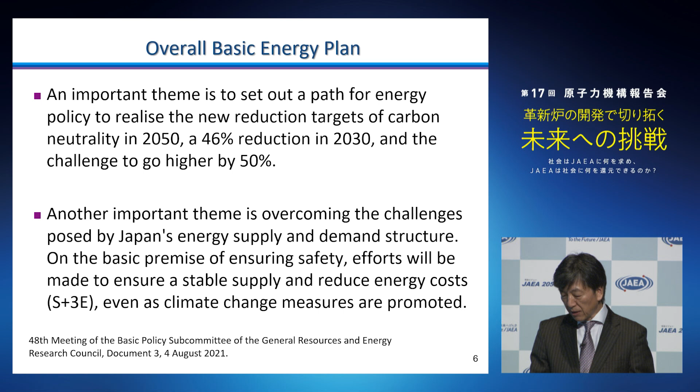It was one year ago that this Energy Basic Plan was formulated, and a lot has happened in the year since then: the invasion of Ukraine by Russia. This caused a disturbance in the oil and gas market. So the international community is in a state of energy shortage or energy cost escalation.

In addition, these situations are not transient, but rather a period of energy crisis directly related to security, which can occur structurally and cyclically. And Japan has been asked to save electricity almost every year for the past several years. It has been happening every year that the reserve ratio of electricity is below 3%, a very small number.

The recognition that the world is experiencing fault line fluctuations in energy was expressed at the Green Transformation GX conference held in August of this year. We must utilize nuclear energy to respond to these issues. It is said that Japan is currently experiencing an energy crisis and energy policy delays.

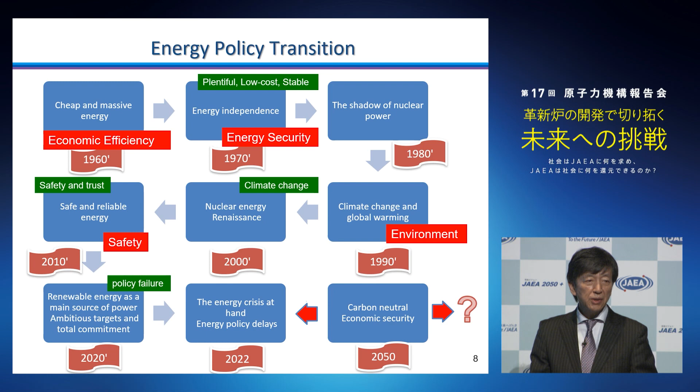Recognizing that we are experiencing a policy failure, that is, an energy crisis and energy policy delay, we are definitely at a point in time where we must develop a firm vision for the year 2050 or even beyond 2050.

Here is a look at how energy and its leading role has shifted. This is the logistic model of energy share. The logistic model is a model that is widely used to describe the prosperity of living species and to explain the phenomenon of one species thriving and then being replaced by another species.

The essence of this model is that the share of one energy source is set as F. The idea is simple: the rate of change is proportional to the share of other energy sources.

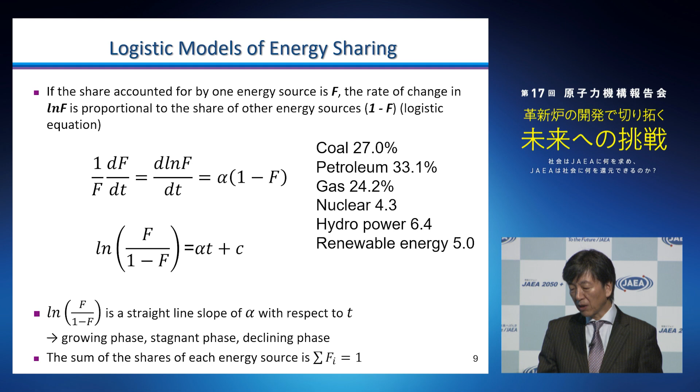On the right, the current share of energy worldwide is described. We still rely heavily on fossil fuels. You can see that nuclear power and renewable energy account for 4.3% and about 10% respectively.

This model was proposed by a scholar named Marchetti, who wrote a paper in 1977 in which he showed a graph like this. This is wood, firewood.

Nowadays, we would call it biomass. And then there is coal, oil, gas, nuclear, and finally, new energy. On the right axis, the share of each energy is written.

Looking back, coal accounted for 70%, which was the largest segment at that time. Petroleum is at 49% at the most.

The thin lines in the graph are the actual data. According to Marchetti's paper, the logistic model explains the share of energy very well.

In other words, it explains that when a new energy source appears, it replaces the energy that has been the mainstay of the market and becomes the mainstream.

This is a 1977 paper by Marchetti, and the reason why we had this kind of model is because our goal was to have abundant, low-cost, and stable energy. In other words, the main energy source has shifted from wood to coal, then to oil, and so on.

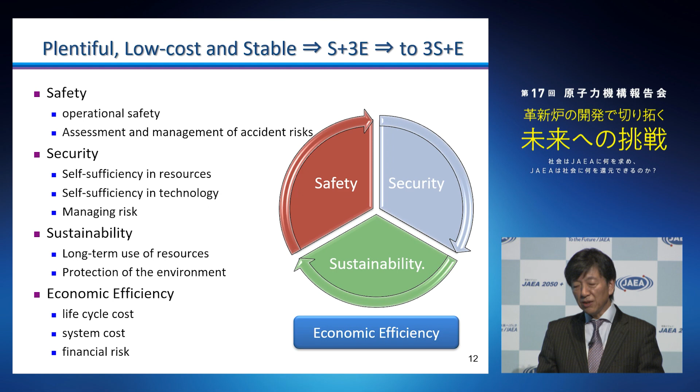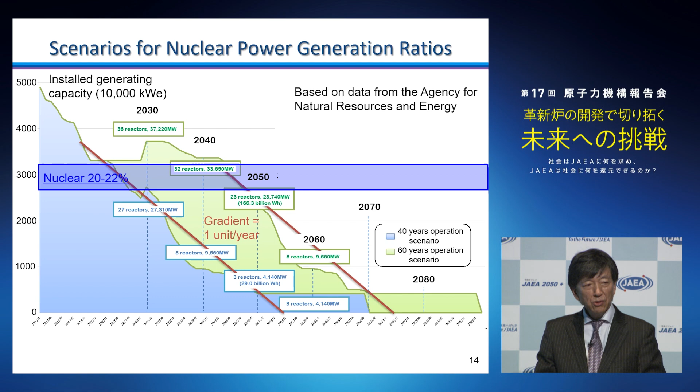As you see, the left line representing the 40-year operation scenario goes below the 20 to 22% range starting from 2030. In the case of the 60-year operation scenario, the line goes below that range from around 2050. The gradient of the line is equivalent to a loss of 1 gigawatt per year, which is equivalent to 1 unit of nuclear power plant.

The feature of the innovative light water reactor is that it has predictable regulatory requirements, foreseeable time of realization, and innovative safety improvements. Priority is given to the development of these innovative light water reactors. Next is the small light water reactor, which the world has high expectations for. From the standpoint of contributing to international cooperation and supporting the supply chain in acquiring business opportunities, Japan is planning on continuing its development to secure options with future needs in mind.

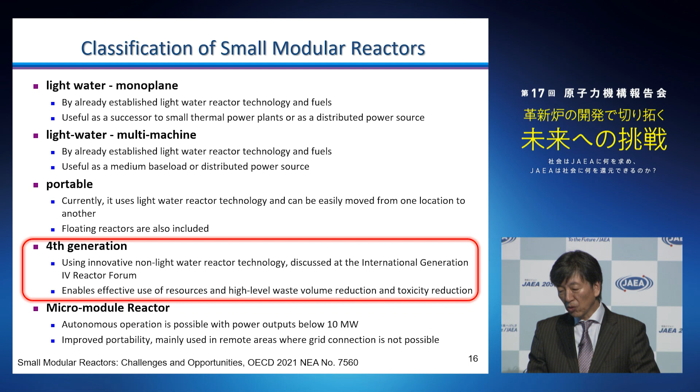Out of them, we should pay attention to the 4th generation reactor. This utilizes innovative non-light water reactor technology and is discussed at the International Generation 4 Reactor Forum. It enables effective use of resources, high-level waste volume reduction, and toxicity reduction, meaning sustainability is an important requirement of this reactor. I think the 4th generation reactor's technological importance for Japan from 2050 onwards comes from this sustainability requirement.

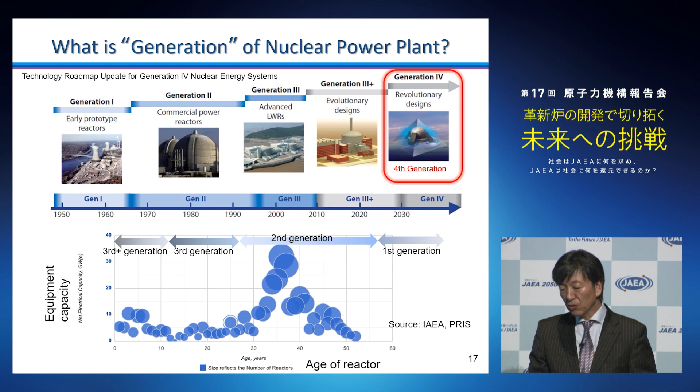Generation 1 reactors were built in the 1950s to 60s, and most of them have already retired. That means the main nuclear power plants that currently exist belong to Generation 2 and Generation 3.

As for the fourth generation nuclear energy system, there are 8 objectives in 4 areas being set by GIF, the Generation 4 International Forum. The 4 areas are: 1. Sustainability, 2. Economy, 3. Safety and reliability, and 4. Proliferation resistance and physical protection.

I mentioned that sustainability is a feature of the fourth generation reactor. As part of sustainability, it is pointed out that fourth generation nuclear energy systems are required to provide global sustainable energy production, which is clean, long-lasting systems that make good use of fuels.

At the same time, the fourth generation nuclear reactors shall minimize and manage radioactive waste, particularly to reduce the long-term management burden, thereby improving public health and environmental protection. Based on such requirements, we must consider energy systems required in Japan for the future.

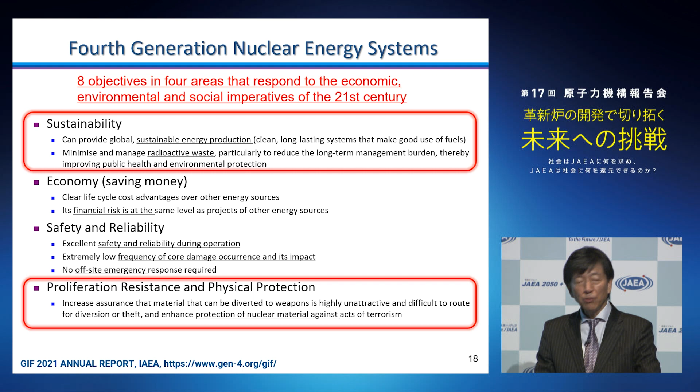As for economy and safety and reliability, they were always necessary in nuclear energy systems, no matter which generation the system may belong to. Now, I would like to share with you this slide that refers to an aspect of effective resource utilization.

The graph shows a forecast of uranium supply and demand. The source is the Red Book, a report on uranium. The solid line represents uranium demand. On the other hand, the shaded areas represent uranium supply. Currently, uranium supply and demand are balanced, though, as you see on the right, if usage by nuclear power plants maintains its pace...

...demand for uranium is around 62,000 tons in 2021, but under a high-case scenario, it will be 70,000 to 99,000 tons in 2030, and 80,000 to 156,000 tons by 2040.

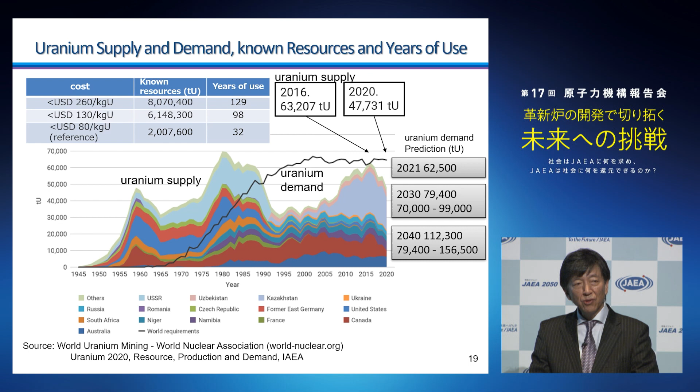As indicated in the table, in case of uranium price at $130 per kilo, which is a realistic price considering mining, years of use of uranium are expected to be 98 years. With that in mind, it is expected that ways to secure uranium resources and share uranium, against the backdrop of decarbonization trends in the world, will be major challenges.

I have been talking about a variety of features that nuclear power has and characteristics required. This is a diagram I created to illustrate my interpretation of innovation according to Christensen. According to him, there are two different innovations: sustained innovation and low-end disruptive innovation.

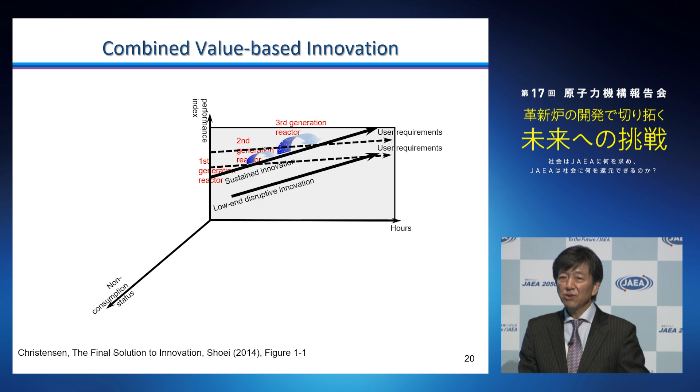The history of nuclear power development has seen the rise of first-generation, second-generation, and third-generation reactors, and perhaps sustained innovation led light water reactors to evolve into improved light water reactors and generation 3 plus reactors. The value that these reactors had was economy. Development of nuclear power took place to provide stable power and enhance economy.

On the other hand, there is another performance index, which is new market-based disruptive innovation. Renewable energy, at its initial developmental stage, was considered insufficient compared to the level of users' performance requirements. Though high safety and environmental compatibility are the values that renewable energy has, and now it has made its way to be a main power supply.

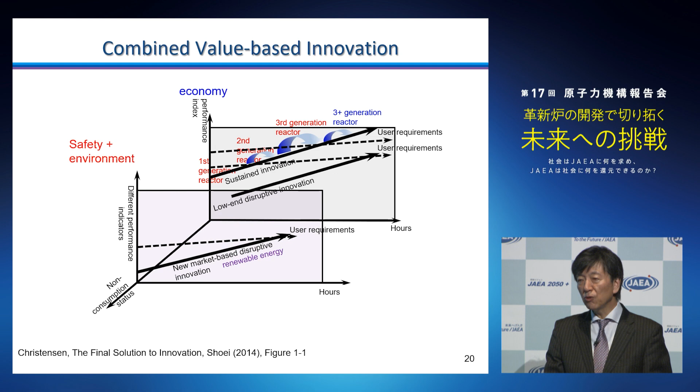So there is the light water reactor that sought after economy, which led it to evolve into generation 3 plus. On the other hand, there is renewable energy that has placed weight on safety and environment, which can now satisfy user requirements. In the future, what will be the main energy? To answer that question, we must create new performance indices, or in other words, new values. I understand that small modular reactors and fourth-generation reactors are examples of that.

We discussed the energy policy of S plus 3E under the context of diversification of values, which was in a way similar to diversification of power supply.

In the future, we will aim to improve welfare by utilizing neutron and radiation. As part of high-temperature gas-cooled reactor, we will utilize heat and deploy it to a variety of industries. Furthermore, from the standpoint of resource and waste, we will develop a sustainable energy system, and it is nuclear power that can propose these multiple values.

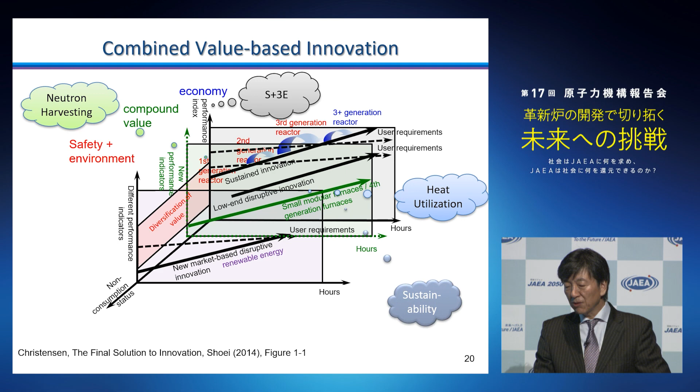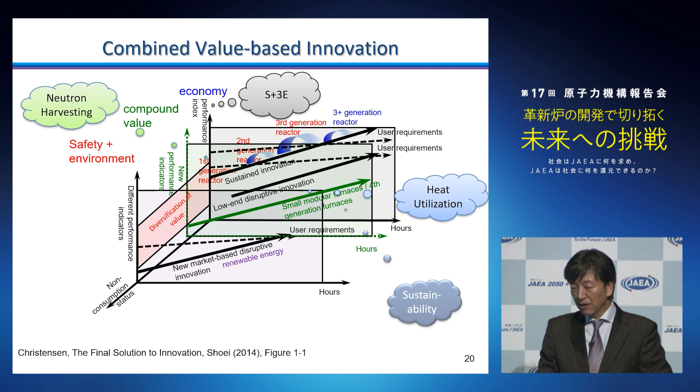I believe that's one important role to be played by this field. In other words, we must not only aim for economy, but also safety. Different technologies, stable supply, and diverse ways of utilization—all these are our expectations for the nuclear power field.

Let me quote from a book written by Jared Diamond. He wrote that invention is the mother of necessity, even though people often say that necessity is the mother of invention. Instead, people argue that an extraordinary genius uncovers a social need and makes a great invention to fulfill it. But he indicated that that is not right. In reality, invention is the mother of necessity. He pointed out that many researchers improve inventions made by predecessors, and a great invention is born when there is an application to which the invention matches, and when the application of the invention is found.

If you look into the actual history of technological development, you will not find a case where a great invention is made all of a sudden. I suppose that many researchers are continuously making improvements by sharing their ideas, and when something that fits the society appears, then that technology will spread all at once. Of course, economic efficiency is quite important for the dissemination to take place. It has to be inexpensive, and it would not be accepted by the society without social status. Furthermore, compatibility with existing systems, in other words continuity, is also necessary. Lastly, Diamond pointed out that the benefits must be straightforward as well.

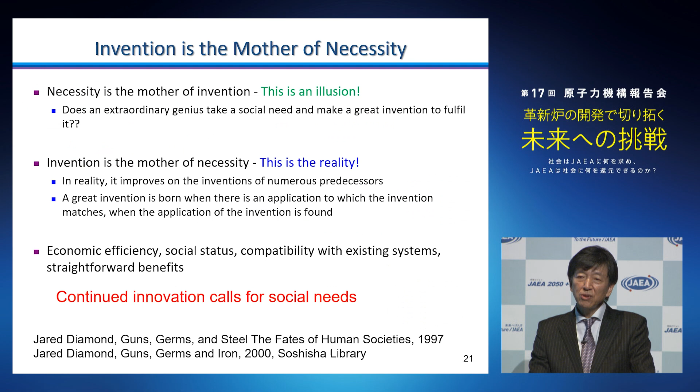Continued innovation calls for social needs. May I quote Charles Robert Darwin, the academic famous for his evolutionary theory. He said, "It is not the strongest of the species that survives, nor the most intelligent that survives. It is the one that is most adaptable to change."

Today's theme is innovative reactor. We are trying to create the future with its development. I understand that President Koguchi mentioned in his opening speech that the time is changing, and JAEA should also change to make maximum achievements out of minimum resources available. May I close my remark by wishing that the Japan Atomic Energy Agency, which holds Japan's most specialized and capable facilities and human resources, would lead establishment and dissemination of innovative reactors. Thank you very much for your attention.

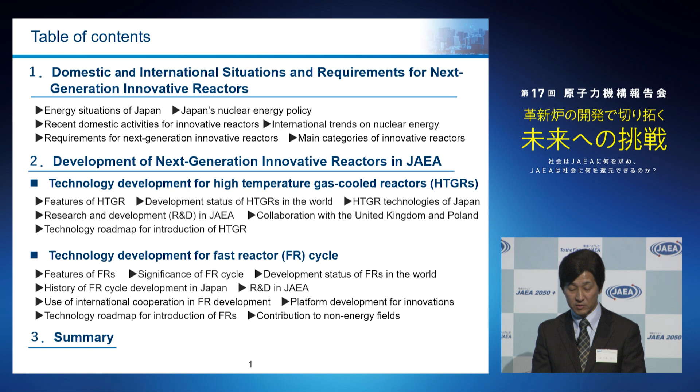My name is Oshima. I oversee the sector of fast reactor and advanced reactor research and development. Today, I would like to report on JAEA's mission for deploying next-generation innovative reactors in Japan. First, I would like to introduce the current status of nuclear energy in Japan and abroad and the requirements for next-generation innovative reactors, followed by the significance of next-generation innovative reactor development, development status, and future outlook.

First of all, I would like to talk about the domestic and international situation and the requirements for next-generation innovative reactors. This slide is a brief summary of the energy situation in Japan. There are 3 points. The first point is Japan's energy self-sufficiency rate is 11.2%. As you can see in the table below, this is very low among developed countries.

As you all know, energy supports all of our food, clothing, and shelter. The fact that 90% of this energy is imported means that energy prices fluctuate and therefore are directly affected by the strong or weak yen. In addition, as seen in the recent invasion of Ukraine, resources themselves may become difficult to obtain. In such cases, there is concern that maintaining industry and livelihood itself may become difficult.

The second point is that the composition of electric power sources is currently centered on thermal power. When thermal power is the main source of power, CO2 emissions are extremely high. The CO2 emission coefficient is about 8 times that of France, which is a very large figure.

The third point is that European countries have interconnected grids and can supply electricity to each other. But in the case of Japan, we are an island nation and have to manage on our own.

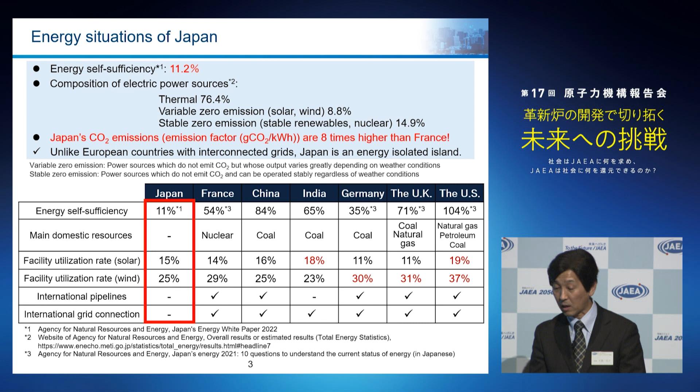Renewable energies are now being discussed in various ways. For reference, here is a report from a British research institute describing the area required for renewable energy, showing the amount of land needed to produce hydrogen equivalent to the amount of oil used annually in 2019. The area circled in red is the area that will be covered by wind power, and the area in yellow is the area that will be covered by solar power.

As you can see, it will be quite difficult to cover with renewable energy alone. Also, we have to consider that equipment requiring such a large area will become waste after 20 to 30 years of use. Renewable energy and nuclear energy each have their weaknesses and strengths. I believe we should aim for the best mix that combines the advantages and complements the disadvantages of each type of energy, as there is no such thing as perfect energy.

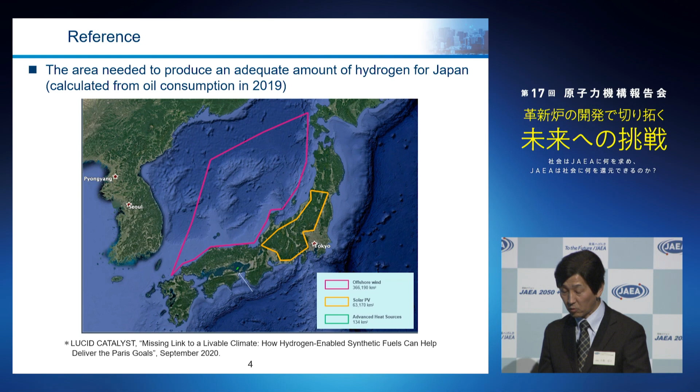This sheet summarizes our country's policy on nuclear energy. As Dr. Yamaguchi explained earlier, the Green Growth Strategy was compiled last year. The details are outlined by Dr. Yamaguchi, so if you look at the blue area in the middle, the growth strategy proposes, until 2050, innovative reactors including FRs, HTGRs, and SMRs.

In particular, it states that fast reactors should be developed based on the strategic roadmap decided at the Ministerial Conference on Nuclear Energy in 2018. In addition, although not energy, there is the experimental fast reactor JOYO, which has been found capable of producing large quantities of radioisotopes for medical use, rarely found in the world. For this reason, it is stated that JOYO is expected to contribute to advanced cancer treatment through restart of operation.

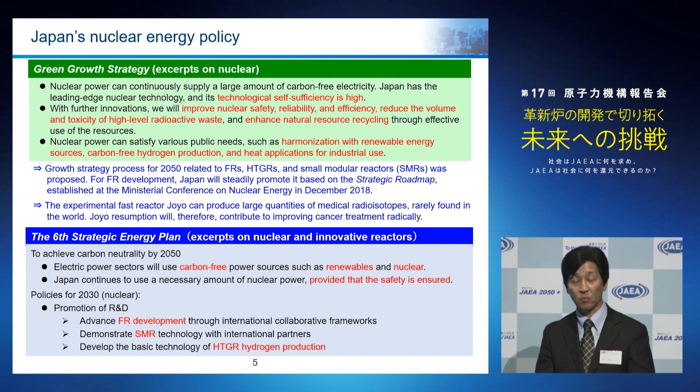In addition, the sixth strategic energy plan, which came out after that, basically follows the green growth strategy. Recently, there have been active discussions on innovative reactors in Japan. For example, the Nuclear Energy Subcommittee, chaired by Dr. Yamaguchi, established a working group on innovative reactors, and at the end of July to August this year, an interim report on the technology roadmap for the development of innovative reactors was compiled.

Fast reactors are being discussed in the Strategic Working Group of Fast Reactor Development Council to revise the strategic roadmap to make it more concrete. The key points discussed here are whether sodium cooling is a promising concept from the viewpoint of maturity, the conceptual design of a demonstration reactor, what the roadmap for R&D should be, and what roles should be played by the government, research institutes, private sector, and other players.

The next topic is also in the process of discussing basic technology in the study group on R&D infrastructure for next-generation innovative reactors. The Japan Atomic Energy Commission of the Cabinet Office is also discussing a review of the basic policy for use of nuclear energy, which was formulated in 2017.

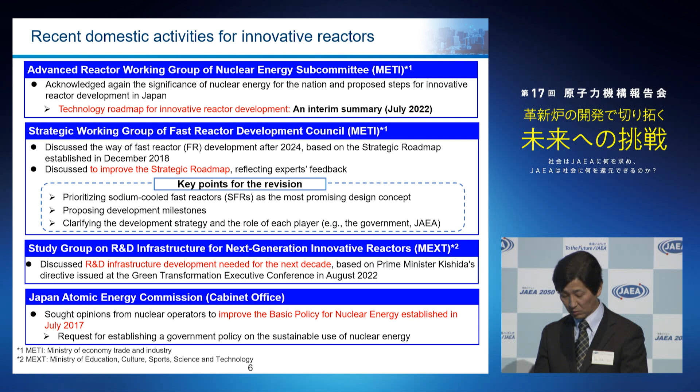As for the United Kingdom, it has decided to increase the share of nuclear power generation to 25% by 2050. As for innovative reactors, a demonstration reactor project for HTGR was started this year, aiming for operation in the early 2030s; we, JAEA, are also participating in this project. In addition, Poland's energy policy through 2040 states it will have 6 nuclear power plants in operation by 2043, and has also expressed the possibility of using high-temperature, gas-cooled reactors, mainly as an industrial heat source.

In the U.S., as mentioned in the video letter, the U.S. Department of Energy has been promoting the Advanced Reactor Demonstration Program, ARDP, which will build 2 demonstration reactors, one of which will be a sodium-cooled FR built by Bill Gates' TerraPower Inc.

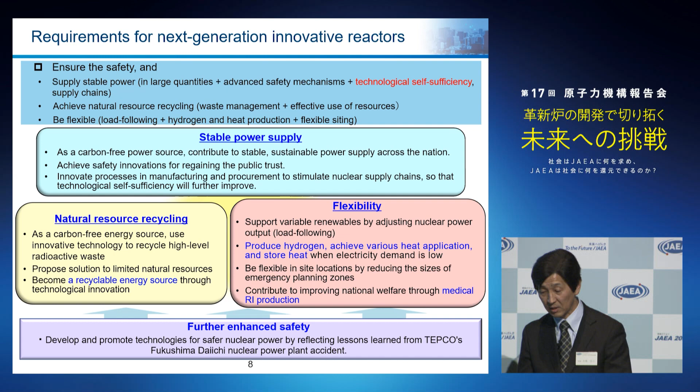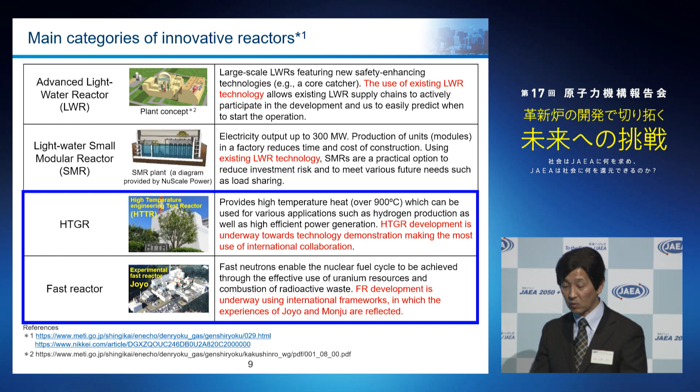As mentioned in Dr. Yamaguchi's lecture earlier, the working group on innovative reactors has selected 4 types of reactors. The first at the top is the advanced LWR, the second is a light water SMR, and then the HTGR and the fast reactor. The details were explained, so I will omit them, but we are currently conducting R&D on HTGRs and FRs in this group.

This fuel is embedded in a structural material called graphite moderator, or it is placed in it. The graphite moderator has high heat capacity and great thermal conductivity, so it can freely dissipate heat outside the reactor. It also has the property of easily cooling fuel. It is also heat resistant up to about 2,500 degrees, making it extremely resistant to high heat.

Thirdly, helium is used as a coolant. Helium is a chemically stable gas that does not react with other gases to produce hydrogen or cause corrosion. Because it is a HTGR that combines all these 3, it has very safe features, so that even if the control rods cannot be inserted in the event of loss of power or coolant, the reactor will spontaneously shut down, cool down, and confine the radioactive materials.

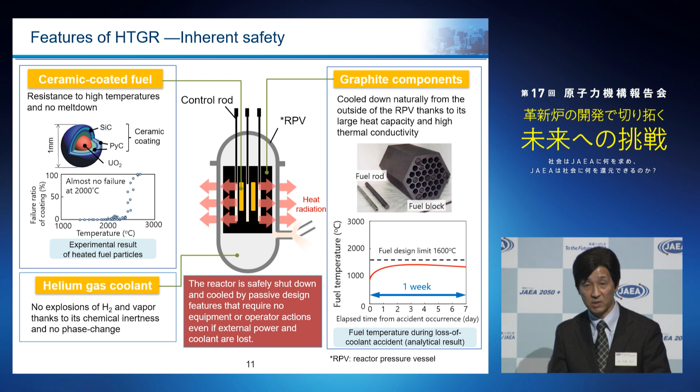We believe that high temperatures of HTGRs can be effectively utilized for hydrogen production. This could replace CO2 in fuel cell vehicles and steelmaking in the future. In addition, various types of heat are used in chemical plants for industrial applications. We believe that it will be possible to supply such heat in the form of steam.

Third, by putting together a hybrid system with renewable energy, we can compensate for the shortcomings of various energy sources and provide CO2-free energy.

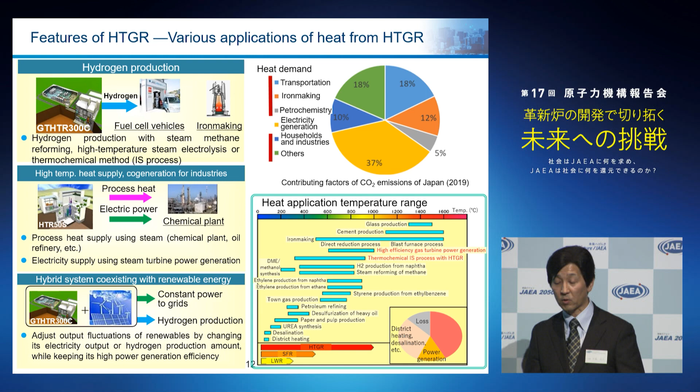The pie chart here shows the source of CO2 emissions. We are now focusing on electricity, which accounts for about 37% of this total. The rest is, for example, transportation 18% and steel 12%. We need to reduce carbon dioxide emissions in this area as well. In this sense, we believe that we can contribute by using the high temperature of the HTGR.

There is a worldwide movement to pursue the merit of HTGR. As I mentioned earlier, the US DOE is taking the lead in supporting the private sector to develop this technology. The UK is also moving forward this year with plans to build an experimental reactor in the early 2030s. Poland has also started a conceptual design to build an experimental HTGR, and our JAEA is participating in this project.

China also has a demonstration reactor already in operation. However, the temperature is over 700 degrees, which is lower than our HTTR of JAEA in Japan, which has a record temperature of 950 degrees. In China, they are generating power. In Japan, we have achieved the highest temperature of 950 degrees and are conducting various tests.

China and Japan are the only countries that actually have HTGRs. In this sense, we believe that Japan has an advantage.

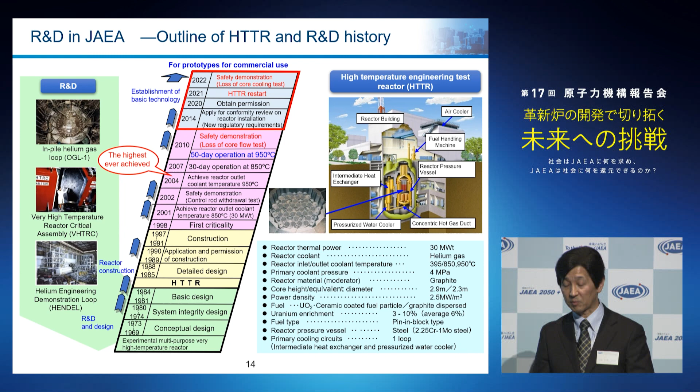On the other hand, after the Fukushima accident, the plant was temporarily shut down to comply with the new regulations together with other facilities. Last year, however, the Nuclear Regulation Authority approved the reactor as safe and it was restarted.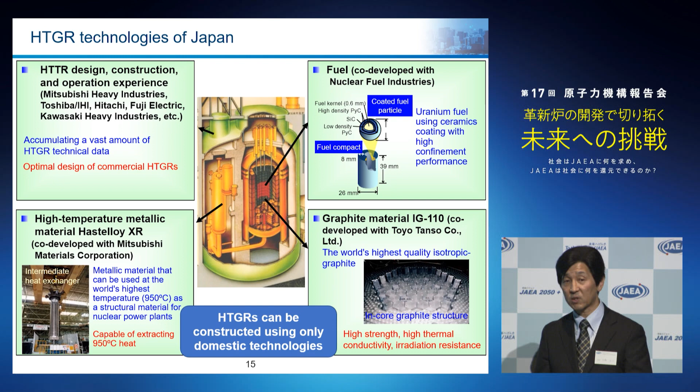This HTGR technology is also very beneficial in terms of technological self-sufficiency. As I mentioned earlier, we built the HTTR on our own, meaning we have accumulated experience in design, construction, and operation in Japan. In addition, the fuel fabrication was jointly developed with Nuclear Fuel Industries, which is also an in-house project. We also have jointly developed the materials with Mitsubishi Materials Corporation that can withstand temperatures of 950 degrees. We are also able to produce the world's highest quality graphite material in Japan. Thus, the HTGR is very beneficial in the sense that it can be constructed using only domestic technology.

JAEA's R&D is currently running in two major areas. The first was a safety demonstration test, which, as I will repeat, was conducted to determine whether the reactor would be safe in the event of an incident or accident during actual reactor operation, or in the event that the pumps used for cooling suddenly stopped, or even if the brake scram was not applied.

We actually tested the system at a low output of 30%. As shown in the figure, the circulator stopped and the reactor power also stopped. The average temperature also dropped steadily, as you can see here. After this, actual testing will be conducted from 100% power in the future.

Another R&D project is a heat utilization test for the HTTR. This is about hydrogen production. In the past, a nuclear reactor and a general facility producing hydrogen have not been linked. R&D on how to ensure the safety of connecting the nuclear reactor and general facilities will be necessary. This project is to be demonstrated by 2030.

The hydrogen facility will use the steam methane reforming process, which is already in practical use. The method emits CO2, but we will first confirm whether hydrogen can be produced using the proven technology.

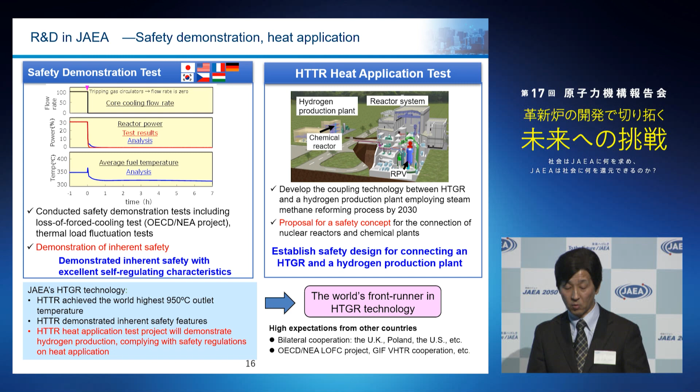In response, we have received requests from the UK and Poland and are now trying to promote bilateral cooperation. In parallel, multilateral cooperation is also underway, and the OECD is promoting the safety demonstration test I mentioned earlier as an international project. We are also contributing to the GIF Generation 4 International Forum for the development of the VHTR, which is currently under study.

I would like to briefly touch on our cooperation with the United Kingdom. The cooperation with the UK is a project to build a demonstration reactor in the 2030s. This project is divided into 3 phases: Phase A, B, and C. Phase A is for a preliminary conceptual study.

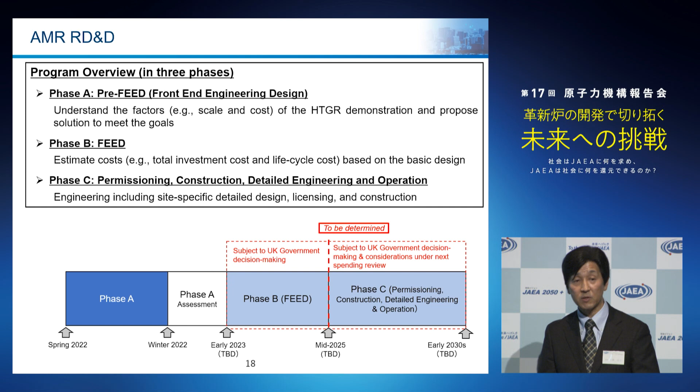It's followed by a feasibility study and basic design in Phase B, and then actual construction in Phase C. Phase A started this year, and various teams applied for this phase. Currently there are 4 teams remaining, and we are part of the team that has tied up with the UK National Nuclear Laboratory and cooperating with them. We are working with NNL on a project to make fuel in parallel with the construction of this reactor, participating as a team together with NNL.

We are also working with Poland. Rather than power generation, Poland is using coal to generate heat to run chemical plants, and there is a request to replace this with a high-temperature gas-cooled reactor. We have been asked to cooperate in the construction of an experimental reactor in Poland, and we are now in the process of promoting technical cooperation.

This sheet is a technology roadmap for the introduction of HTGRs in Japan. An innovative reactor working group was formed under the Nuclear Energy Subcommittee, and this is a technology roadmap as one of the proposals presented in the discussion. The goal is to build and start operation of a demonstration reactor in the mid-2030s and to conduct various research and development activities toward that goal. This is a concrete proposal.

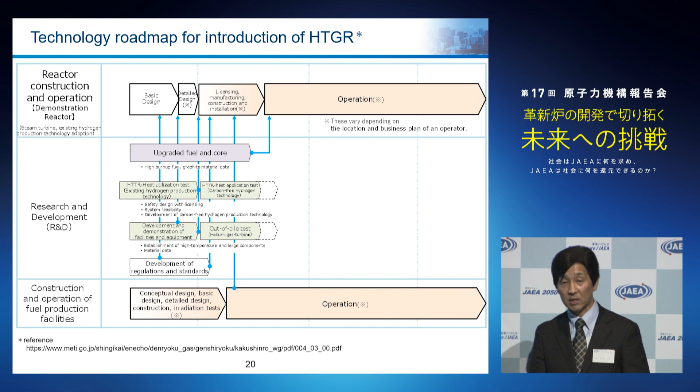I would now like to shift my talk to the fast reactor, FR cycle. First of all, the characteristics of fast reactors are summarized in this sheet. There are 3 major features of fast reactors here. One is to use fast neutrons — that's why we call it a fast reactor. It uses neutrons that come out after nuclear fission without moderating them.

The question is, what can we do with this technology? One is that there is a large amount of uranium inside that does not burn originally, but this can be converted to burnable plutonium. In other words, it is possible to create new fuel than the fuel used by operating the plant. Another point is minor actinoids, which are the source of high-level radioactive waste. In operation, this high-level waste is generated, but if you hit the minor actinoids with fast neutrons, they can be destroyed by nuclear fission. In other words, it can be used as fuel. We use fast neutrons for these 2 major purposes.

The second feature is the use of liquid sodium. Liquid sodium may have a high level of chemical reactivity, and although there were accidents in the past with the fast breeder reactor Monju, liquid sodium was originally chosen so that these fast neutrons would not slow down. Also, liquid sodium has a high boiling point. For example, water boils at 100 degrees at 1 atmospheric pressure, but in an LWR it is operated at about 300 degrees by applying high pressure. The boiling point of liquid sodium is 900 degrees, so it can be operated without pressurization. Therefore, stable operation is possible even at 500 or 600 degrees. Higher temperature means higher thermal efficiency, so energy can be used more efficiently than in LWRs, and energy can be generated.

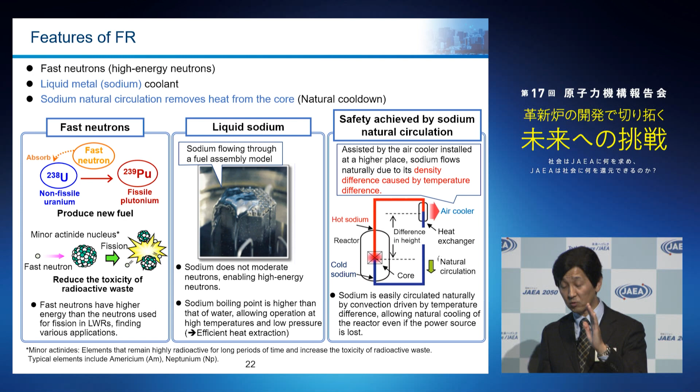The third feature is safety due to natural circulation. Liquid sodium is used, as I mentioned, in a simple core which is cooled by coolant. Even if the pumps were to stop, the warmed sodium would rise to the top of the reactor, just as warmed air rises when you make fire with wood. Even if there is no pump in the reactor, the sodium warmed up in the core will circulate on its own. The circulating sodium carries heat, and when the heat exchanger is installed, it can exchange heat with an infinite amount of air on its own. So even if an accident similar to the one in Fukushima were to occur, the cooling system would cool itself by cooling the air on its own.

Here I summarize the significance and features of the FR cycle.

First is the efficient utilization of uranium resources, 10 times more than that of LWR, is possible. Around 0.7% of imported uranium is currently utilized for light water reactors, while the rest, 99%, is non-combustible uranium. By utilizing fast neutrons, we'll be able to recycle it. Currently, battles for securing uranium have started, yet supply is said to last for around 100 years.

100 years with just 1%. So if the rest, 90% if not 99%, can be utilized, I think more than 1,000 years worth of stable supply will be possible. In Japan, we can recycle it domestically. With the purchased uranium, we can create next energy inside the country. That means it enables us to create energy without import. In that sense, it can make a major contribution to effective utilization of resources and sustainability, which Dr. Yamaguchi referred to, and directly lead to enhancement of energy security, which is currently an issue.

Secondly, it enables us to alleviate the environmental load. Of course, this is possible not only with FR cycle but with nuclear reactors in general. It does not emit CO2 during operation.

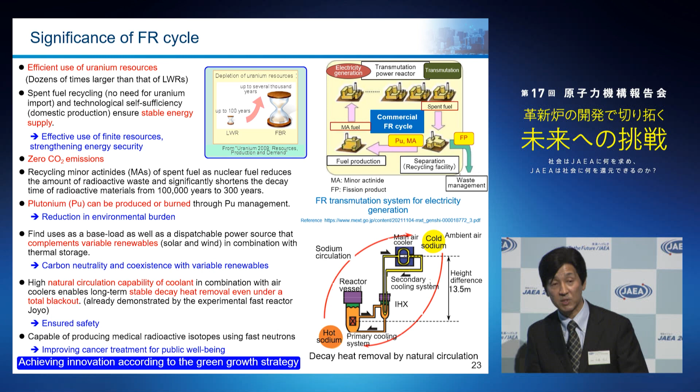Last is medical radioisotope. It is not energy, but as it is identified to be quite effective in cancer treatment due to fast neutrons, this should also make sufficient contribution to realization of innovation required in the green growth strategy.

Here you can see a summary for development status of FRs in the world. Russia is the most advanced in this field. Nuclear reactors go through 4 different steps: experimental reactor, prototype reactor, demonstration reactor, and commercial reactor. In Russia, they already have a demonstration reactor being operated. The demonstration reactor started operation in 2015, and I think it already reached 82% utilization in 2020.

In September of this year, they have already replaced all the fuels with MOX fuel, which is a mix of plutonium and uranium. In 2030s, Russia is expected to reach the stage of commercialization. With technology shared by Russia, China is following Russia, proceeding at a similar pace. India used to be significantly behind but has caught up with Japan recently.

On the other hand, in the West, many of the moves stopped due to environmental issues. But as I have mentioned, the United States is accelerating its efforts as a national project and is taking a lead. As for Japan, as I will later mention, we have gone through the stages of experimental reactor, prototype reactor, and demonstration reactors.

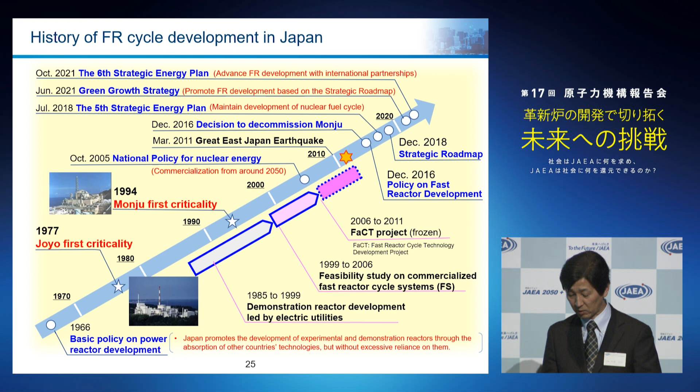On the slide, I summarize what has been done with Joyo and Monju. With Joyo, we demonstrated the breeding performance to see whether plutonium was really produced from incombustible uranium. Actually, we demonstrated that plutonium can be generated inside Joyo.

Additionally, Joyo was given a role to develop new materials and fuels to be made in the future by irradiating fast neutrons. That role has not changed.

As for Monju, which is not being recognized often, it enabled us to establish designing and construction know-hows and a variety of safety evaluation methods through the process of building Monju itself. Furthermore, it had been operated with 40% output, which enabled us to gain relevant know-how. On the other hand, it ended in a short period of time, so unfortunately, we could not gain data on reliability in case of long period operation and rationalization of maintenance.

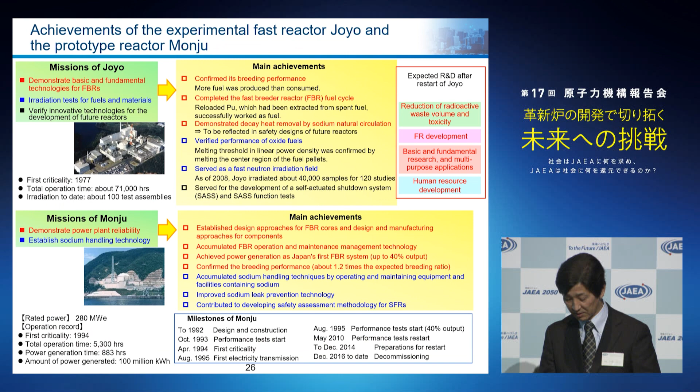Subsequently, we have conducted a variety of development through the FaCT project and French-Japanese cooperation. We especially put our efforts on improvements of safety, and Japanese-French joint design and technology has abundant safety improvements being made. We co-developed the tank-type demonstration reactor.

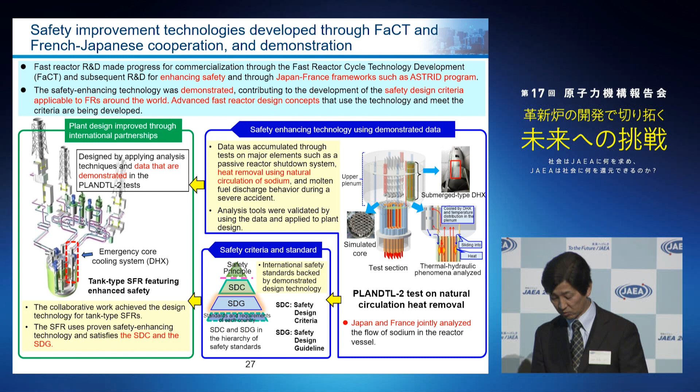In terms of safety, Japan is taking the lead to develop SDC, Safety Design Criteria, and SDG, Safety Design Guidelines, to be adopted as international standards. We expect that they will soon become international standards. For enhancement of safety, Japan and France are working on different joint researches, creating a variety of things.

Let me present a bit about safety with this slide. This shows an approach to safety assurance. To begin with, there are 3 basic principles in nuclear power: to actively shut down, to actively cool, and to confine, which has been strengthened up until now.

On the other hand, I think that innovative reactors come with additional new functions to spontaneously shut down, spontaneously cool, and spontaneously terminate. With such functions, defense in depth, which enables prevention of occurrence of abnormality, prevention of evolution of abnormality, mitigation of accident, and prevention of evolution to severe accident, and mitigation of serious accident, will be realized through the innovation.

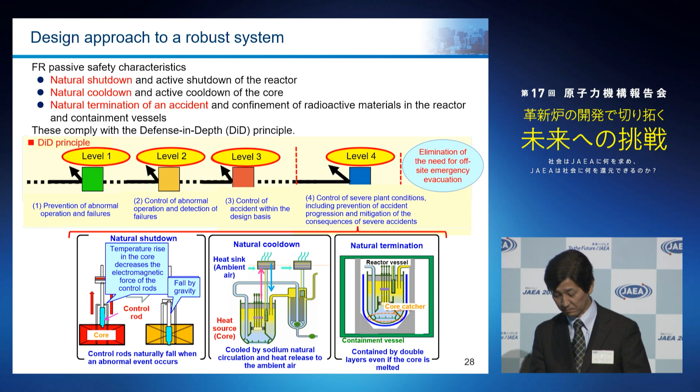With the innovative reactors, let me give you an example of these factors being embedded into fast reactor. Due to time constraints, I will not mention details. We've always had control rod.

In case of fast reactors, for spontaneous shutdown, there are functions available to automatically drop control rods and to scram based on detected temperature. For spontaneous cooling, natural circulation is embedded abundantly in fast reactor. For confinement, even if reactor core melts down, the fast reactor has a core catcher and functions to contain all of those things inside the reactor vessel.

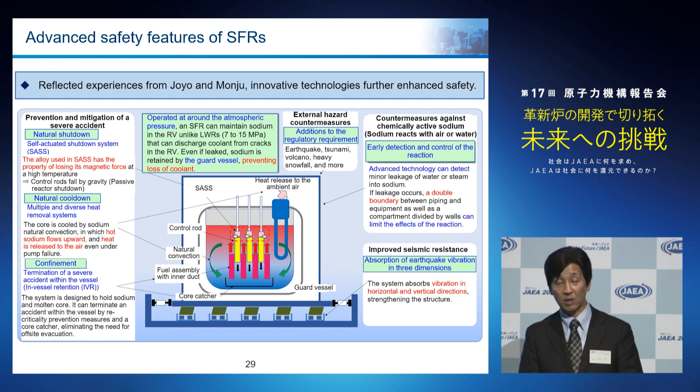What about external events which became problems in Fukushima? In order to respond to these events, designing that pays consideration for earthquake, tsunami, fire, and volcanic eruption will be introduced. In the future, we will embed 3D seismic isolation to enhance quake resistance as well.

As for the fuel cycle technology development, as I've mentioned, we are planning to conduct demonstration with minor actinide, a source of high-level waste, to see whether it can really be extracted and combusted. We've once separated minor actinide from spent fuels before. Even though it was low in volume, we are ready to conduct an experiment. We achieved recovering the world's highest level of 2 grams of minor actinide.

We will put the minor actinide inside fuel to create a new fuel. If we could realize restart, our plan is to put the fuel inside Joyo to burn. That would enable us to close the cycle of operation by recovering minor actinide from spent fuel and adding a little bit more fuel to burn. We are getting close to demonstrating these things.

In terms of enhancement of reliability, we are executing R&D activities to demonstrate sufficient safety by conducting irradiation tests for MA-containing MOX fuel.

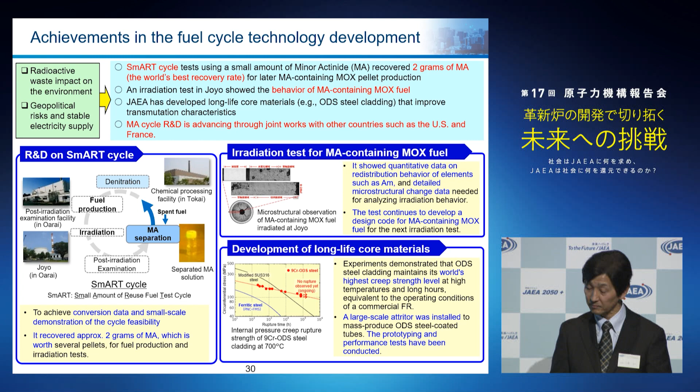Let's take a look at the use of international cooperation in FR development. We do not conduct all the development alone. We utilize a variety of international cooperation to efficiently develop. We are closely cooperating, especially with France, as France is also aiming to realize a fast reactor cycle, as they do not have abundant resources either.

In France, ASTRID was launched, and there was a plan to construct a demonstration reactor along with ASTRID, but they decided to freeze that. That was based on the judgment that they should build a radiation reactor first and that they can wait a bit longer for the demonstration reactor. On the other hand, to proceed with research and development, they signed a new R&D collaboration agreement to continue on with the basic research and part of design.

As for Japan and the US, as you saw on the video letter, under the Japan-US cooperation for civil nuclear, cooperations are taking place bilaterally for things such as development of diverse materials and creation of computer simulation tools.

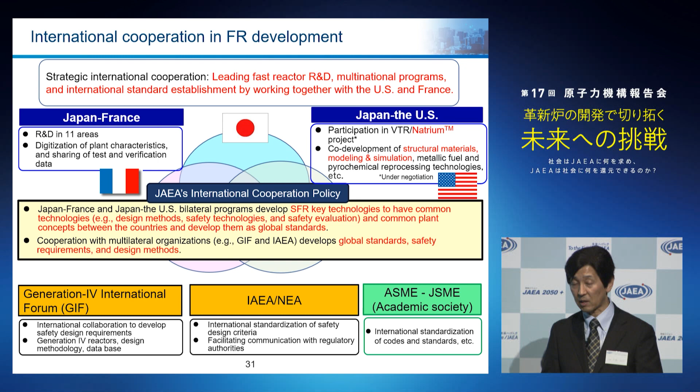Our idea is to utilize bilateral cooperation for manufacturing and R&D activities. On the other hand, things such as codes and standards, safety requirements, and design methods should be standardized internationally. So we are cooperating with IAEA, GIF, also known as Generation 4 International Forum, and academic societies including ASME, American Society of Mechanical Engineers, and Japan Society of Mechanical Engineers to prepare for standardization.

Let me present an example of a collaboration with the US. This is an R&D collaboration promoted this year with a private company called TerraPower, operated by the famous Bill Gates. They are proceeding with activities to build a natrium reactor in Wyoming by 2028, possibly around 2030. We are studying to identify whether there are any areas of possible collaboration out of a variety of candidates for R&D activities.

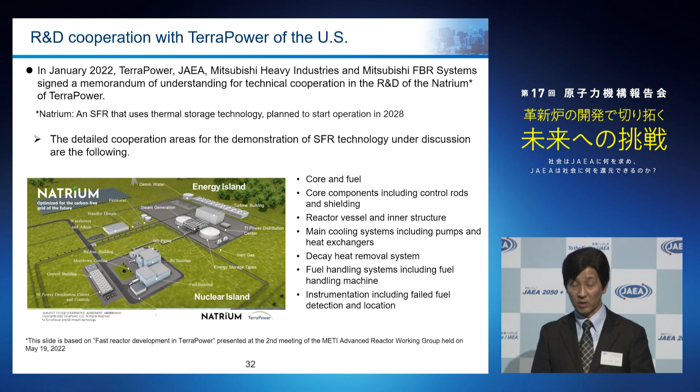On top of that, we are also conducting conceptual examination. We are currently in the middle of design review based on our experience. We have mentioned a bit about hardware. And for us, it has to be made in an inexpensive way. On top of that, R&D activities itself must be conducted rationally to effectively utilize research resources as much as possible.

On the other hand, it is becoming increasingly difficult to hand down technologies. In the past, we could constantly conduct experiments and build nuclear reactors every once in a while. That enabled us to successfully conduct generational shift, but it does not work so well anymore. Against that backdrop, we feel that utilization of computer simulation, which has been going through advancement, can be an answer, so we are working on its research and development.

We call it ARKADIA. What you see here is the main body of ARKADIA. You can see 3 spheres, for example. It would be ideal if a system would give us a design with optimal design and optimal indices based on past knowledge, after we input information such as type of plant we would like to build, expected cost, and targeted safety.

ARKADIA is based on 3 systems, one of which is called KMS. It is a knowledge system that gathers and accumulates knowledge on things such as Monju and fuel production. Things gained from overseas will be stored here as well. Another system is VLS, which conducts simulation. It can do a variety of complex simulation, so we can connect the simulation with the knowledge. Another system is called EAS, that controls and optimizes the aforementioned 2 systems.

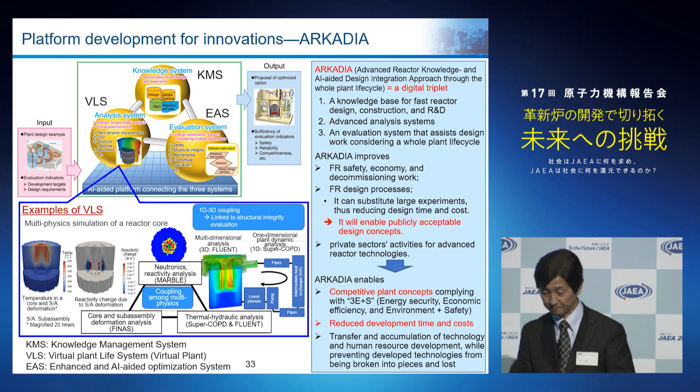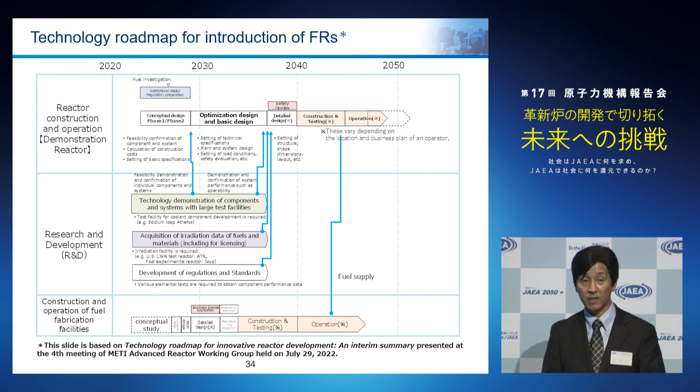This technology roadmap for introduction of FR is presented at the Advanced Reactor Working Group. R&D activities will take place aiming to start operation of the reactor in the middle of 2040s, about 10 years after the gas reactors. I will not touch upon the details of R&D, but it includes demonstration of a variety of technologies with large test facilities, development of fuels and materials through acquisition of fuel materials data, and development of regulations and standards to prepare safety-related concepts accordingly. Under the Advanced Reactors Working Group, a discussion was conducted to aggregate all of these efforts to realize construction of the reactor in the middle of 2040s.

This is not energy, but may I introduce a contribution to non-energy fields. By using nuclear reactors, including fast reactors, medical radioisotopes for cancer treatment can be produced. Currently, molybdenum technetium is used to test cancer, but almost all of the material is being imported from outside of Japan. The short half-life span poses a difficulty of transportation, and events such as the invasion of Ukraine can stop air traffic. When air traffic stops, all of a sudden the material will not be available.

Therefore, there is a strong call for domestic production of the material, and we believe nuclear power can make a contribution there. Another point is related to cancer treatment. Recently, there has been a lot of attention paid to actinium. Actinium is a nuclide that undergoes 4 alpha decays. The idea here is to inject actinium inside the patient without conducting surgery, directly transport it to the location of the cancer, and completely heal it with the 4 decays.

There is a case where actinium was applied to treatment of cancer that metastasized throughout the body, though unfortunately mass production of it is not possible. Currently, we can only create actinium enough for 3,000 people annually.

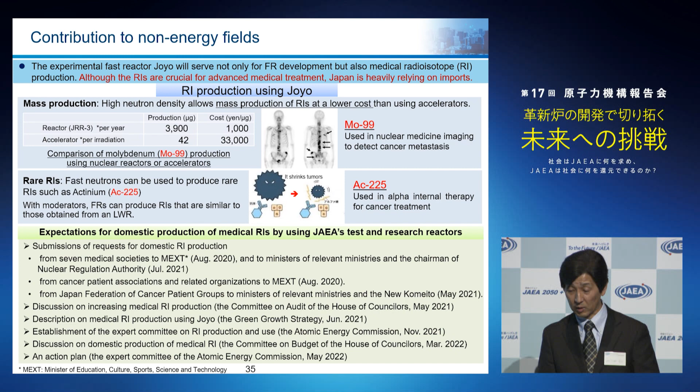We also received requests from cancer patient groups as well. Against that backdrop, the Atomic Energy Commission adopted an action plan in May of this year, and we are earnestly conducting research and development activities to quickly supply actinium.

Let me summarize my presentation. I think it is important to achieve both carbon neutrality and ensuring of long-term energy security that is not affected by overseas conditions.

Nuclear technology has already provided more than 30% of Japan's electricity. In that sense, I think that nuclear technology is a competitive and realistic option. Next-generation reactors are also effective for multi-purpose use as well. As I mentioned, it can support renewable energy sufficiently and can contribute to carbon neutrality of industrial and transportation sectors.

On the other hand, as long as the use of nuclear power is promoted, it is essential to achieve plutonium management and reduce the volume and toxicity of radioactive waste. In that sense, I think there is no meaning in using nuclear power if we cannot commercialize a fast reactor cycle. As for HTGR, I think we can contribute to hydrogen production by utilizing our technology related to 950 degrees Celsius operating temperature.

As for fast reactor, Russia and China have reached the level of commercialization already. We in Japan have reached demonstration level through Monju. This is a national strength, and Japan-France cooperation and our cooperation with TerraPower have been attracting international attention. It is necessary to promote it by leveraging international cooperation.

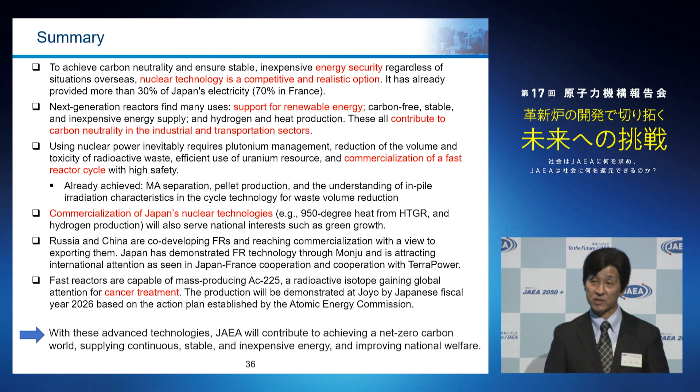As for actinium, which is attracting worldwide attention for cancer treatment, we must contribute to enhancement of national welfare through its mass production. Through steady technological development, JAEA will contribute to the realization of decarbonized society, including hydrogen and heat utilization, stable and inexpensive energy supply on a 1,000-year basis, and improvement of national welfare. That is all for my presentation.